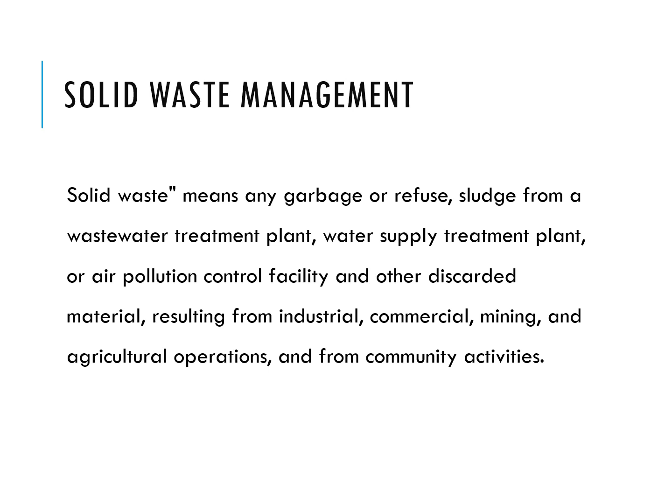So what do we understand by solid waste management? It is a term which means any garbage or refuse, including sludge from a wastewater treatment plant or a water supply treatment plant or an air pollution control facility or any other discarded material resulting from industrial, commercial, mining, agriculture operations or from any community activities.

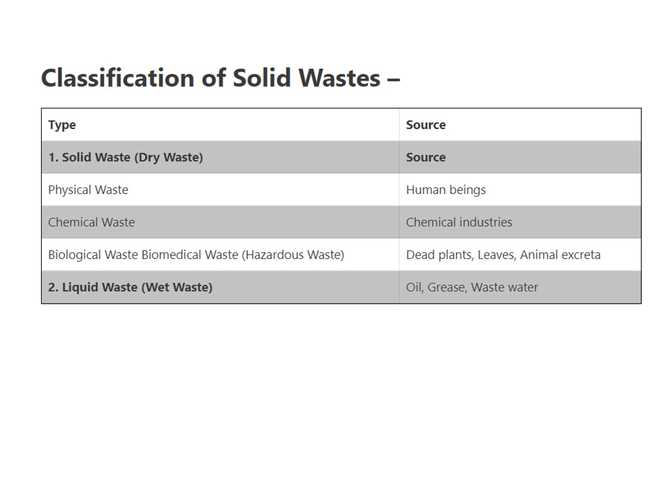How do we classify solid waste? They are classified primarily as solid and liquid waste. Solid waste includes physical waste, chemical waste, liquid and biological waste, which can be hazardous waste. The physical waste includes source from human beings, chemical waste from the industries, and biological waste from dead plants, leaves, and animal excreta. The liquid waste includes oil, grease, or the wastewater which comes from household facilities.

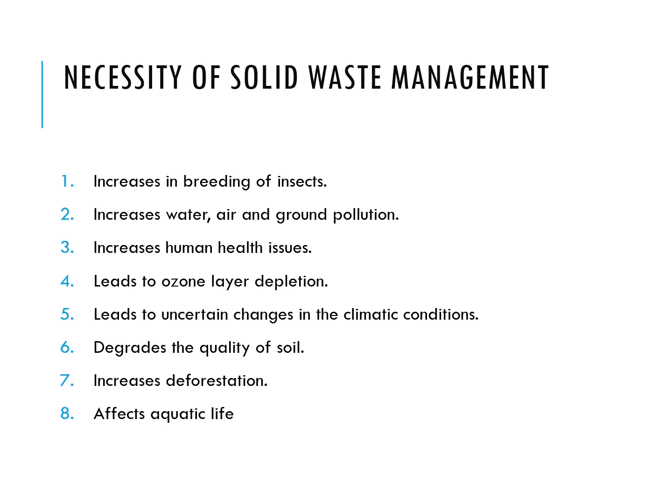The necessity of having a solid waste management. Why do we need to have the concept of a solid waste management? Because it can lead to increase in breeding of insects. It can lead to increase in water, air and ground pollution. It can lead to increase in the human health issues. It can lead to ozone layer depletion because of production of greenhouse gases, and it leads to uncertain changes in the climate conditions. It degrades the quality of soil, increases deforestation, and can affect the aquatic life.

So what is the present situation in India? About 0.1 million tons of municipal solid waste is generated in India every day, with per capita waste generation in the major Indian cities ranging from 0.2 kg to 0.6 kg. Per capita means how much waste every person generates in India.

So the top Indian cities for waste generation are Delhi, followed by Greater Mumbai, and third is Chennai. So the total waste which is generated in India annually is 62 million tons, with 43 million tons collected, with 19 million tons not collected, and the way it is treated is not a scientific way. Out of that, 11.9 million tons is treated, and 31 million tons is dumped in landfill. The top 5 municipal solid waste generators annually are these countries: India, US, China, and Brazil.

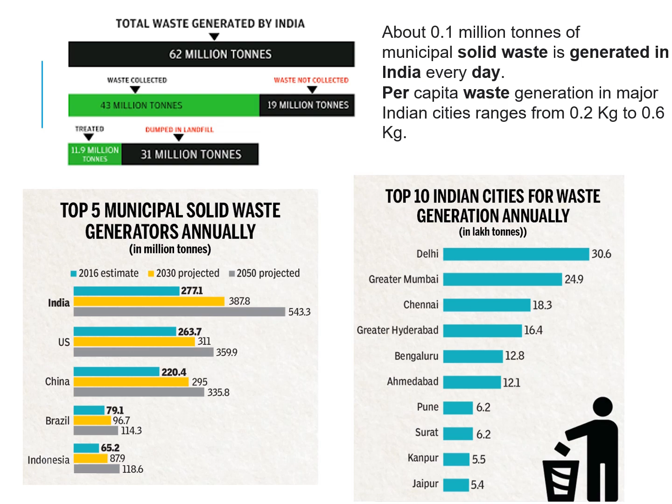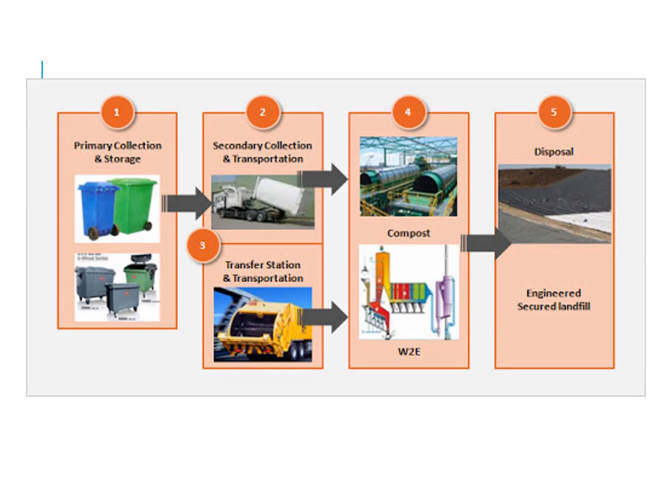So it is imperative for us to properly collect, segregate, transport, store, and eventually dispose of our solid waste. So we can see the concept of solid waste disposal working very well in some cities of India, like the metropolitan cities of Greater Mumbai, Chennai, Bangalore, or Delhi. But if we come to the other cities or even the districts, this method of collection and storage is in a haphazard manner.

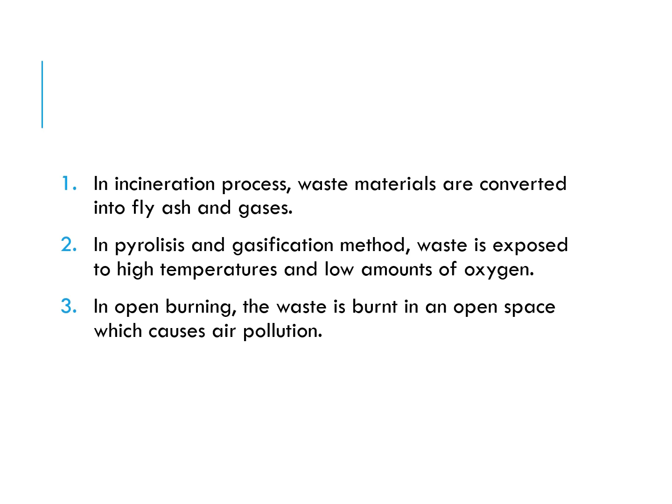Thermal treatment is further classified into incineration, second pyrolysis and gasification, third open burning. In the incineration process, the waste materials are converted into fly ash and gases. Incineration is a process which is primarily used for biomedical waste management. You are well aware of that. In the pyrolysis and gasification method, the waste is exposed to high temperature and low amounts of oxygen. In the open burning method, which a lot of cities also do, the waste is burned in the open space, which causes a lot of air pollution and can be harmful to the population there.

Solid waste methods for dumps and landfills. So we have something called a sanitary landfill, controlled dumping, and bioreactor landfill. Let us come first to the insanitary landfill. In this method, with absence of space and population pressure, the waste is just dumped in one part of the city. It is close to the population. This is an insanitary landfill. Such conditions give rise to diseases or sometimes leaching of pollutants into the water table, as well as harmful gases in the environment, which can affect the health of the population living near the cities.

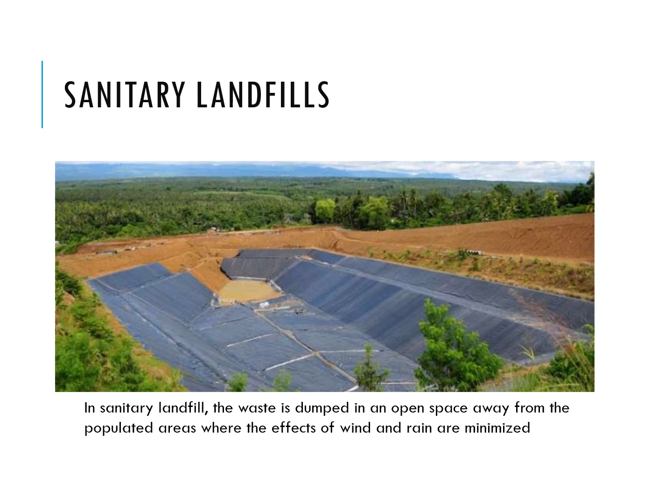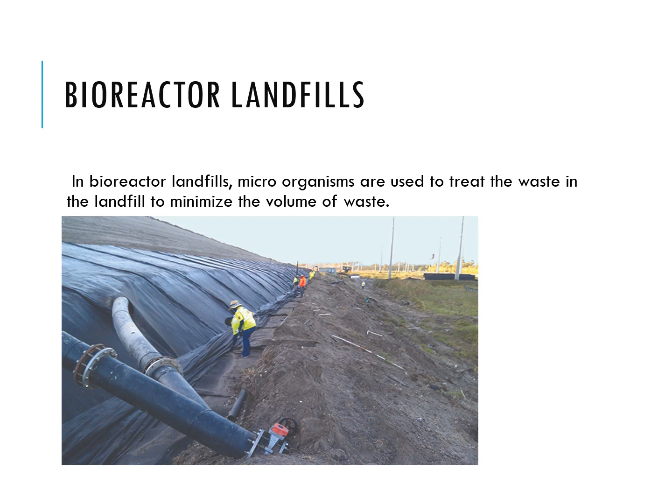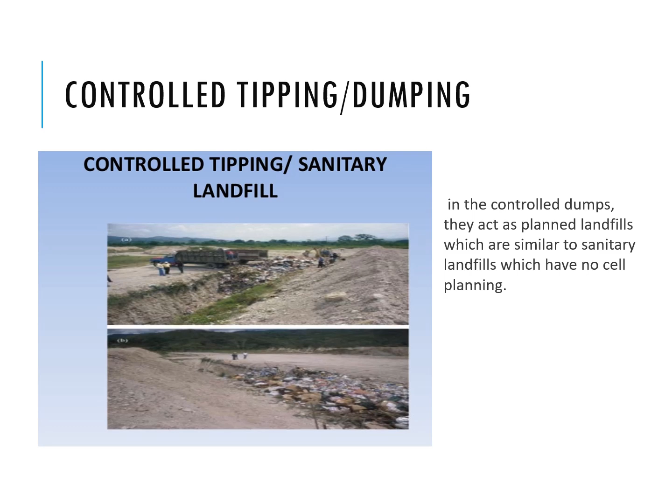What is controlled tipping or dumping? It is similar to something called a sanitary landfill, but here in controlled tipping, they are similar to sanitary landfills but which have no cell planning. Like there was a cell planning in sanitary landfill, it's a controlled way. You just put a JCB and you dumped it on a controlled dump.

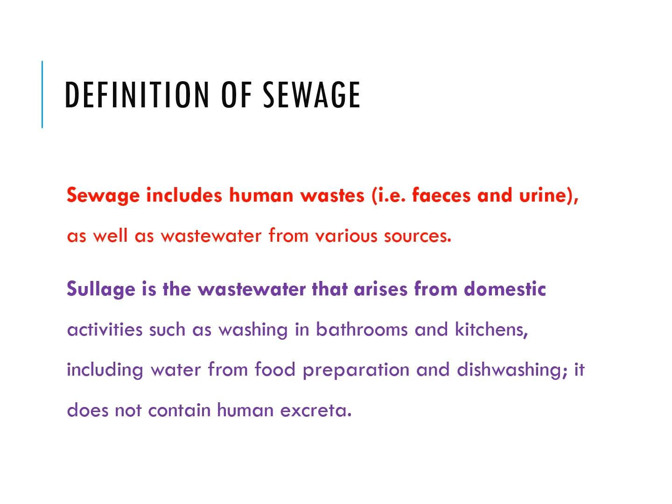Coming to the next part of our presentation is the definition of sewage. Sewage includes human waste, feces and urine, as well as wastewater from various sources. So how do we differentiate it from sullage? Sullage is wastewater that arises from domestic activities such as washing in bathrooms and kitchens, including water from food preparation and dishwashing. It doesn't contain human excreta.

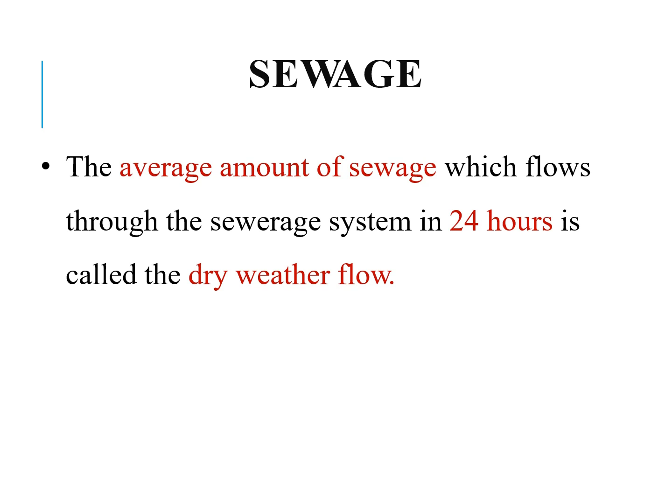The average amount of sewage which flows through the sewerage system in 24 hours is called the dry weather flow. So this important term you should understand. What is the meaning of dry weather flow, which will be used in the sewage treatment process. So the amount of sewage which flows through the sewerage system is called the dry weather flow. Most important part, when the treatment of sewage comes, I will be briefing you about this.

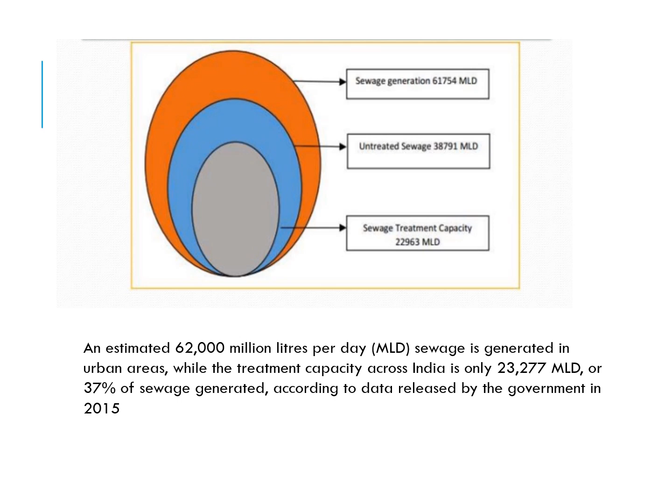And what is the estimated amount of sewage which is generated in India? It is estimated that 62,000 million liters per day of sewage is generated. Out of it, the majority of the sewage, 63% of the sewage which is generated, is not treated and is just sent into the water bodies.

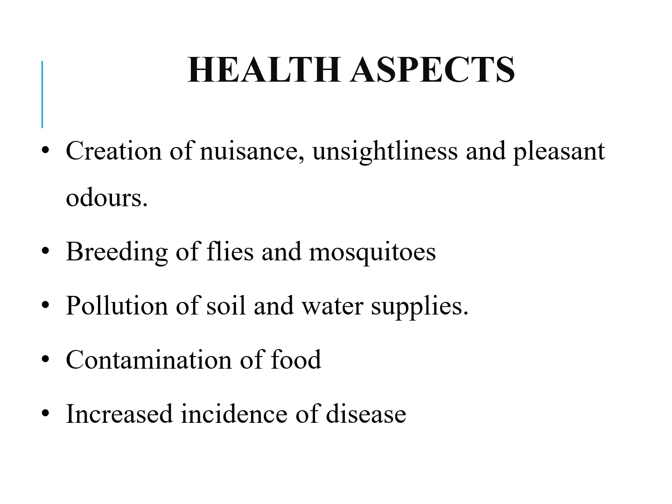What are the health aspects of such a thing? Creation of nuisance, unsightliness, and unpleasant odors. Untreated sewage can lead to breeding of flies, mosquitoes, and hence rampant diseases. It can lead to pollution of soil and water supplies. It can lead to contamination of food and increased incidence of disease in the population. Sewage consists of just 0.1% of solids and 99.9% of water.

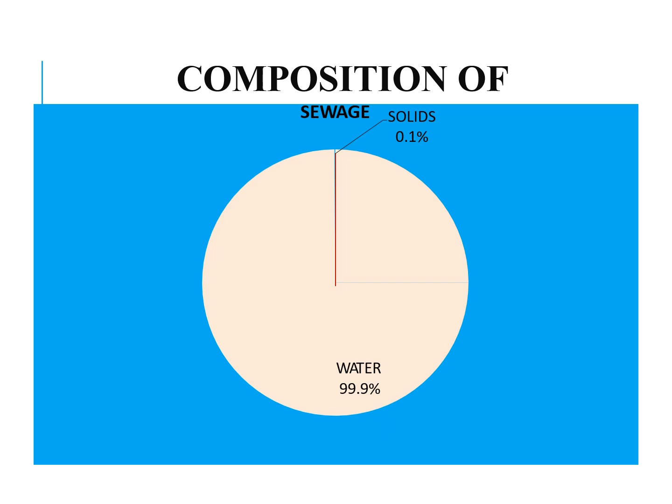The aims of sewage purification are to stabilize the organic matter so that it can be disposed of safely, to convert the sewage water into an effluent of an acceptable standard of purity, which can be disposed of in land, rivers, and sea. See, every sewage has to be disposed of either in land, river, or sea. But before doing that, it's ethical that you always make the sewage absolutely non-hazardous.

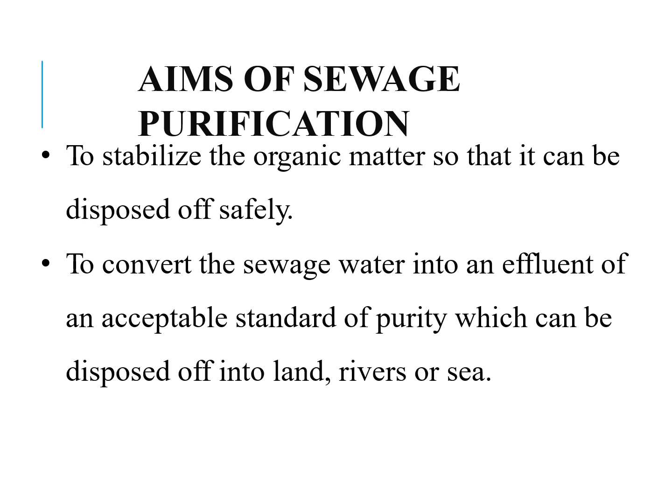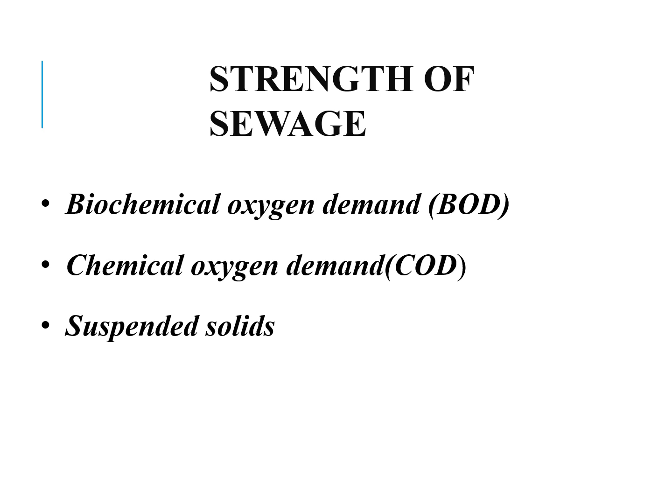The strength of the sewage can be measured using three parameters called the biochemical oxygen demand, chemical oxygen demand, and suspended solids. For us, the biochemical oxygen demand is very important. What do we mean by it? It's defined as the amount of oxygen absorbed by a sample of sewage during a specific period, generally 5 days, at a temperature of 20 degrees Celsius for aerobic destruction. In other terms, the more the biochemical oxygen demand, the more organisms there are and the more need for treatment.

So, biochemical oxygen demand ranges from about 1 milligram per liter for natural waters to about 300 milligrams per liter for untreated domestic sewage. If the biochemical oxygen demand is 300 milligrams per liter and above, the sewage is said to be strong, and if it is 100 milligrams per liter, it is said to be weak. Higher biochemical oxygen demand means that there are more organisms inside.

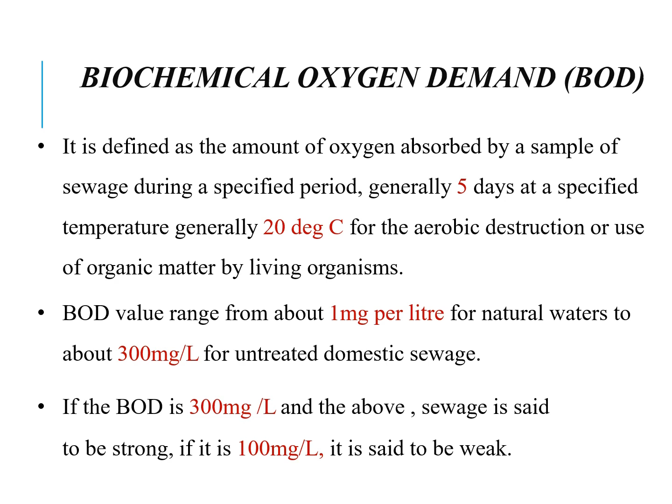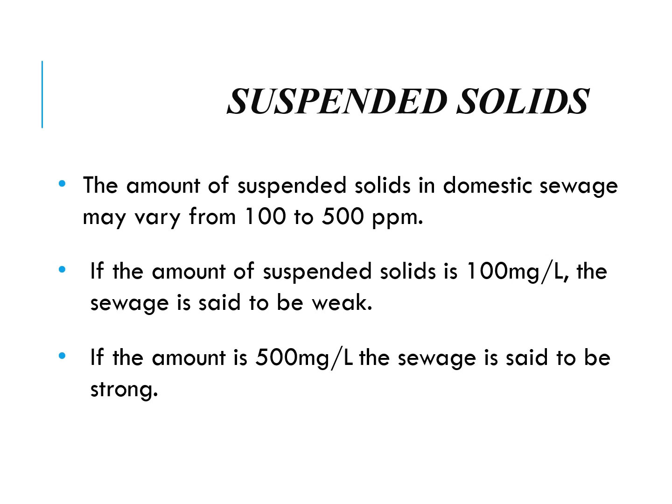Suspended solids. The amount of suspended solids in domestic sewage may vary from 100 to 500 parts per million. If the amount of suspended solids is 100 milligrams per liter, the sewage is said to be weak. If the amount is 500 milligrams per liter, the sewage is said to be strong.

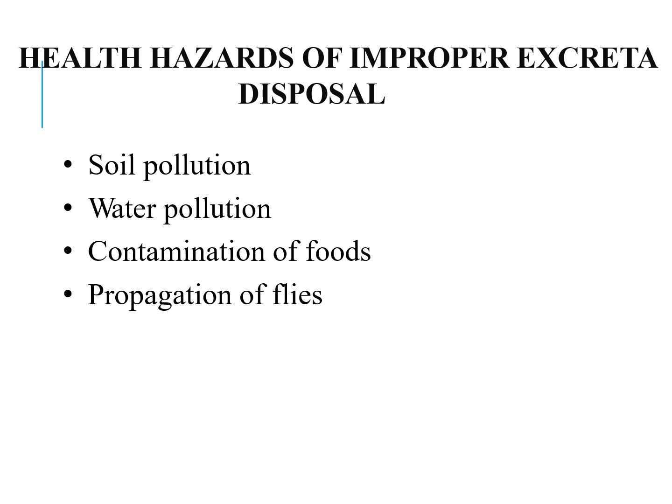We have all discussed soil pollution, water pollution, contamination of foods, and propagation of flies due to excreta. Why is it imperative to dispose of excreta, and what are the various methods of excreta disposal? A sanitation barrier can prevent transmission of feces through water, fingers, flies, soil, and food to unprotected hosts. So, what is this sanitation barrier?